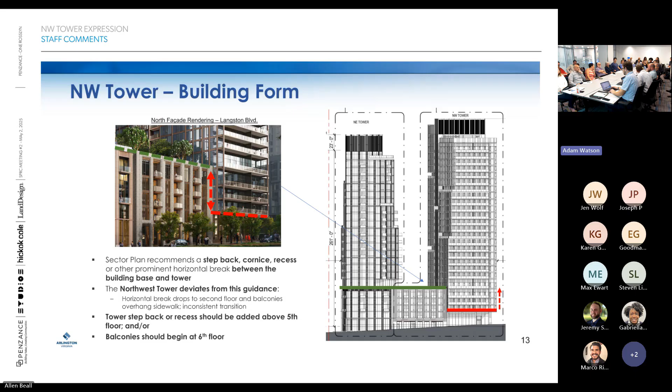Sharing, so... I have a PDF of it I can try. Are you on the Arlington wireless network or are you on a phone? Allen, if it's okay, let me see if I can run it from my computer. I don't know if you've sent the latest, there were a couple of small changes. Let me just email it to you. That's all right, okay sure.

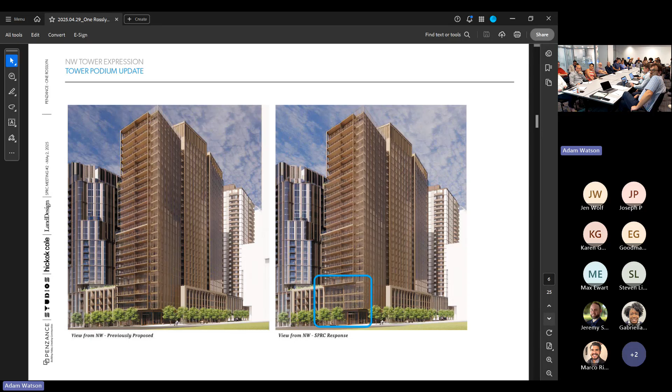On the left is the original Northwest Tower configuration, featuring a consistent application of balconies on the north elevation of the Northwest Tower at the corner of Langston and Fort Myer Drives. On the right is our updated design, reflecting several iterations studied in response to your feedback. We've removed the balconies from the lower levels of the tower to better integrate the podium with the tower above, and to better define the transition between podium and tower elements.

This adjustment brings the architectural language of the Northwest Tower down to the base, enhances light and air access to the retail frontage below, and establishes a stronger, more continuous horizontal datum at the top of the podium. We believe these changes result in a clearer and more cohesive expression of balconies as a design element, and better define both the tower and the podium as part of the overall composition of this tower.

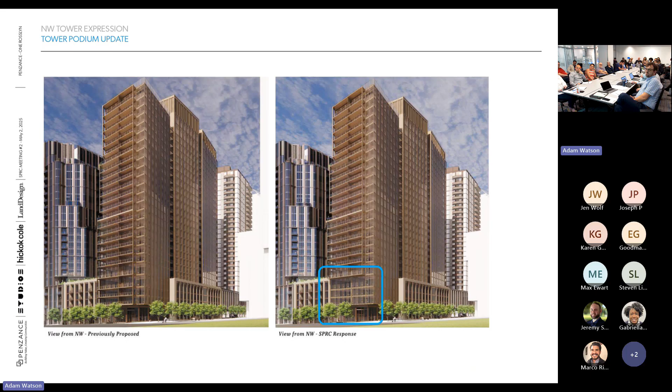Transition from Gateway Park - this is a follow-up item from SPRC 1. We were asked last time to find a way to continue the expression of the park onto our site. We thought this was a good idea as well, so we looked to find what design threads we could draw upon to help knit the two spaces together.

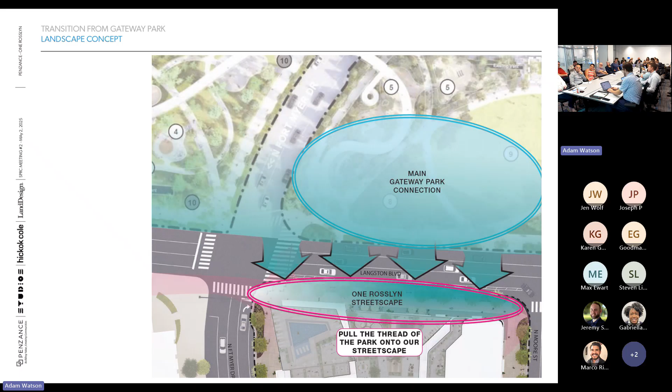This diagram illustrates the revisions we made to the layout. For the planting material, the intent is to mirror and express the same lush plantings on our side of Langston, including matching the tree and understory plantings. This lush landscape material is also intended to extend down both streetscapes of North Fort Myer Drive and North Moore Street towards the heart of Rosslyn.

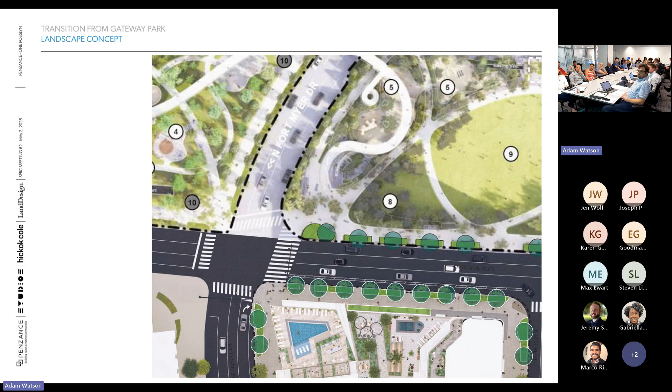Our tree pits here are longer to better match the park, and we will pick up some of the same organic forms being used. These longer tree pits will help provide a lush green experience on both sides of the street, and these longer runs of tree pits will have fewer interruptions, helping with pedestrian safety.

If we were to stand in this location today, we would be standing in a service road. Currently, the service road has no sidewalk along Langston - it has about a 5 to 6 foot walkway against the existing building. As seen in this image, we are transforming this service road area into a new urban streetscape, with generous sidewalks at about 11.5 feet clear width, using county standard paving, street lights, benches, and receptacles.

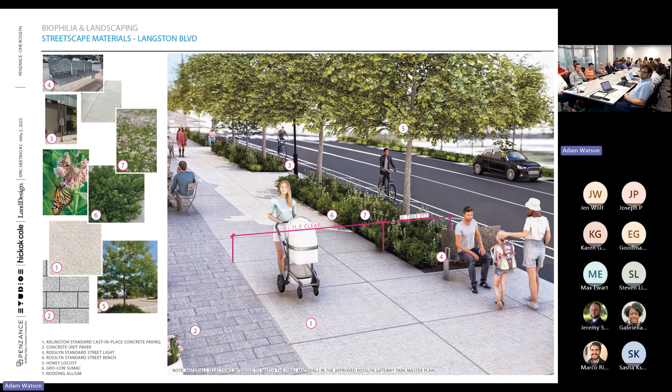As the park gets refined this year, we aim to coordinate with the design team for the park and the county to ensure a consistent biophilic experience.

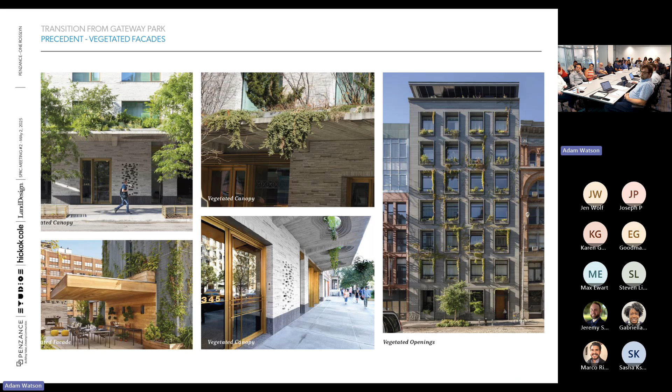We are also looking to continue the biophilia vertically up the building towards the podium. We aim to do this by providing a vegetated canopy. On screen, we have a few examples.

The canopy is proposed to span between the north towers, carrying the landscape material vertically. It is sized to provide adequate soil depth for the planting. The canopy will provide some privacy for the units above and help create additional protection from the elements for the retail shoppers and people dining below.

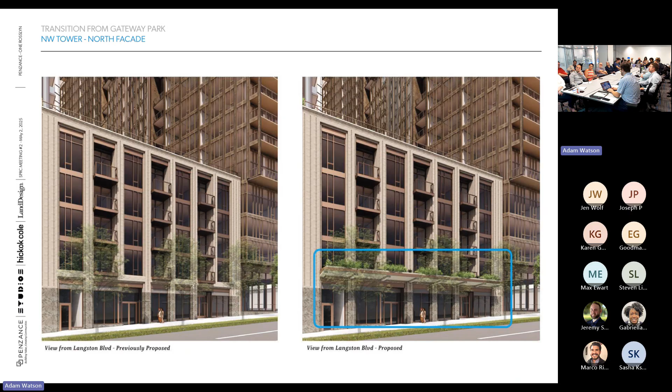Next, we'll cover the 19th Street streetscape, a follow-up item. Our lush planting design continues down the streetscapes of Fort Myer and North Moore Street to terminate here at 19th Street. For this design, we have enlarged our tree pits to provide more greenery, while taking care that they've been coordinated with the vast amount of underground utilities in this area.

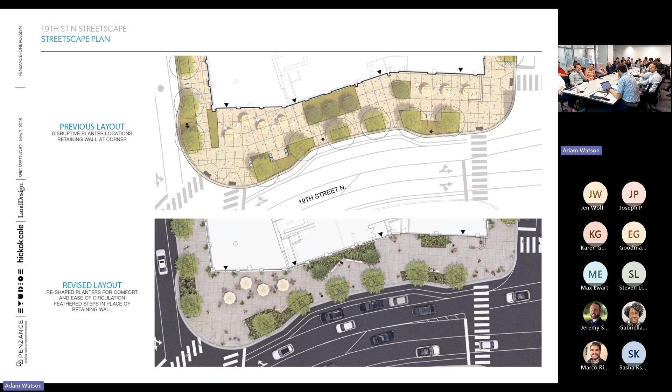This revised layout has relocated the planters to improve pedestrian circulation connectivity. We do have some steep slopes we are contending with here. As shown in this rendering, we have reconfigured the retail entry of the South Tower to have feather steps, allowing for easier circulation and helping to accommodate the change in grade.

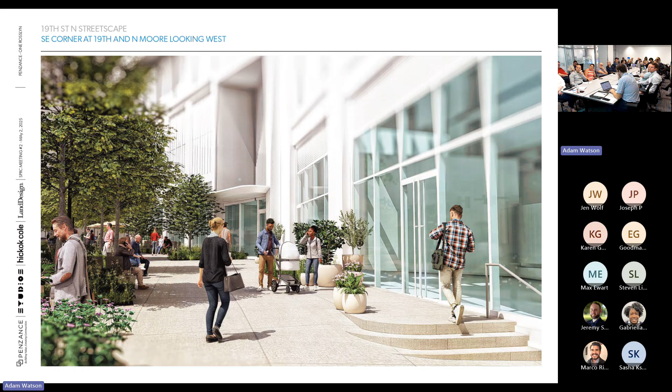This can be experienced in the streetscapes, where we are taking service roads and transforming them into walkable lush places, and at the podium level, where this large area is broken up into smaller spaces, which helps create a sense of enclosure and being surrounded by life.

Along with the biophilic design, we are also providing required elements such as bioretention at the podium level. We are meeting the tree replacement and biodiversity requirements, and we are exceeding our required tree canopy coverage by almost 8%.

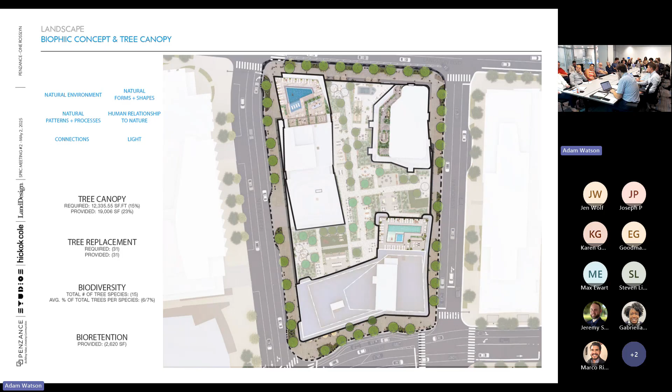Great, my name is Alan Beal, I'm the architect for the site planning. This part of the presentation is new information on transportation, an overview of the transportation aspects.

This is an existing aerial photograph highlighting how the existing buildings are a relic of 1960s and 70s Rosslyn urban planning, with service roads that loop around the site and interrupt pedestrian transitions, buildings deeply set back from the roads, and streetscaping and plantings that only front minimally, such as on Fort Myer Drive.

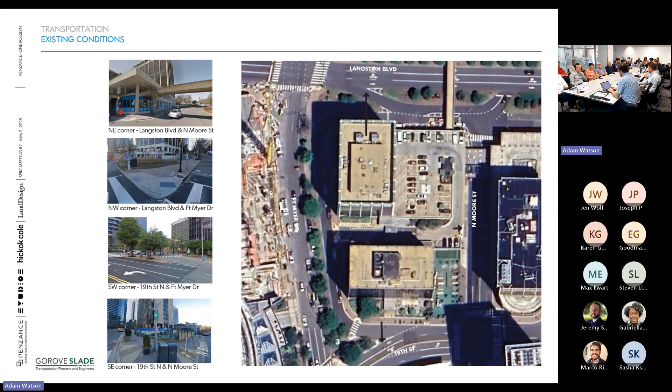Highlighting some of the existing urban conditions: on Langston Boulevard, upper left, there's a lack of continuous streetscape and pedestrian pathways due to the service roads, narrow sidewalks, and lack of queuing area at crosswalks. On 19th Street, there are narrow sidewalks and interruptions to pedestrian paths of travel due to the service roads. On Fort Myer, parking is prioritized over pedestrians on both Fort Myer and the service road, and the walking path on the service road is unusable due to narrow width and lack of continuity. Finally, on North Moore to the right, there are narrow sidewalks that lack streetscape and greenery.

Looking at this proposed development, which we're very excited about, the goal of the sector plan is to create a more urban, pedestrian friendly environment, bring buildings closer to the sidewalk, bring the sidewalk out, and create more pedestrian friendly space.

Looking at this development, the curb lines have been pulled out, making it much more pedestrian friendly. The development looks to deliver much needed housing to the neighborhood. The previous plan only had 150 residential units; this one has 837, including some for-sale units as well. There's 15,000 square feet of retail split between the north and the south. On the north, the retail will help activate the new Gateway Park across the street and enliven the streetscape. On the south, it's closer to the existing node of retail in Rosslyn and Metro. Overall, this will be enough for at least 3 to 5 new retailers, depending on size and final use.

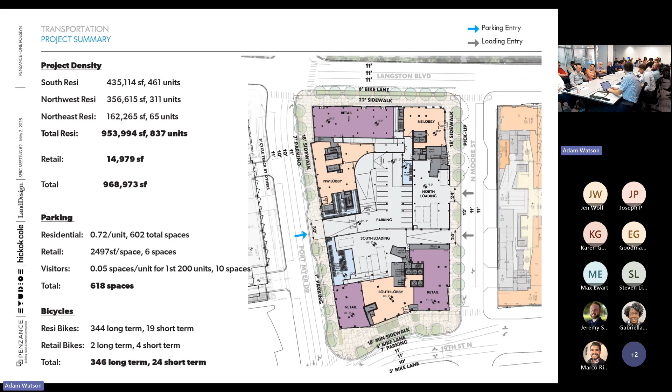Overall, the site design will make it a much more pleasant experience for cyclists and pedestrians by adding bike lanes, more generous sidewalks, and crosswalk improvements. On-street parking will also be provided along Fort Myer, along with pickup drop-off on 19th and North Moore. And finally, protected bike lanes will be added along Langston, further meeting the multimodal goals of the sector plan.

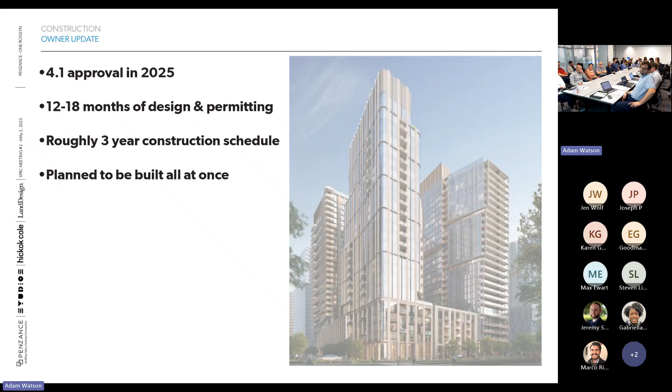So that was it, so last slide. I just wanted to say how excited we are about this project, how excited we are to share the project, and wanted to thank everybody for their engagement in this process Thursday night. So thank you.

While Adam is getting his slides up, I want to make sure everyone is on the same page with respect to the last slide, and only because it took me a good 3 years into my tenure in the Planning Commission to really understand this.

The 4.1 approval means the land use entitlement. It means that from a zoning and land use perspective, the applicant is allowed to move on to the next part of the process, which is getting the plans approved, engineering approved, and getting the permits to actually start building. So we are just talking about the permission to build the thing from a zoning perspective. I like to mention that because, probably due to my own slowness, it took me a while to understand that there was another process beyond what we're involved in.

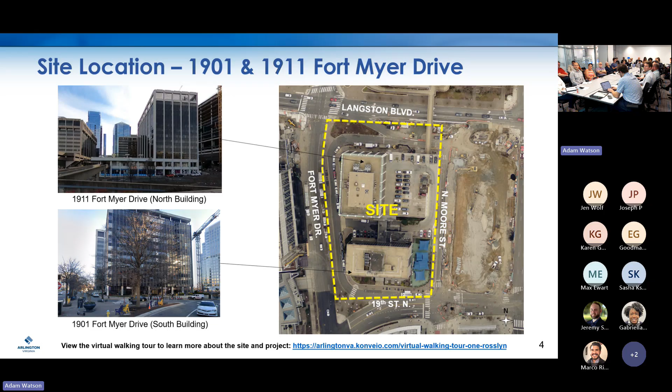Sustainability—I just wanted to touch on the applicant's sustainability proposal briefly. I think Alan just mentioned this. We talked about this a little bit at the last SPRC meeting, but just to reiterate, the applicant is proposing to achieve LEED Gold here. They're not asking for bonus or additional density through our green building incentive policy, but they are committing to doing some things that are part of that policy. That includes things like Energy Star appliances and fixtures, WaterSense plumbing, the energy cost savings Alan mentioned, air and duct leakage standards, and EV charging with 4% installed and 15% EV ready. So this proposal does meet the sector plan's recommendation for achieving LEED Silver or above.

Just briefly to talk about landscaping and streetscapes, and this will bleed a little bit into what Mr. Gibson's going to speak about next. This proposal overall really does further the sector plan principles and policies when it comes to landscaping and our streetscapes. Here on the screen are a couple of principles and policies taken from the sector plan that illustrate how this is being done.

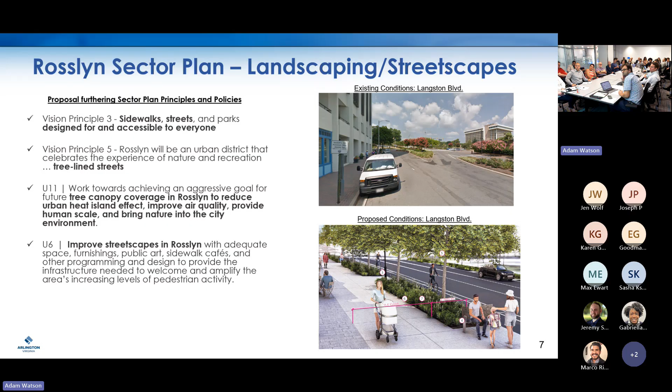As Adam mentioned, staff's role principally in this process is to review projects against the established policies in the county, and then to coordinate our review against all of the other projects that are going on in the area, and make sure that the projects are designed consistent with county standards.

The county has really a number of layers of plans which we use to evaluate these projects. From a transportation perspective, at the high level, we have the Master Transportation Plan. And then as we go down into the sector plan level, in this case the Rosslyn Sector Plan, it has a number of goals and policies which really relate to how transportation will be reshaped at this site and the adjacent sites. It's not just this site—while it's very important to do this, it doesn't work without what has gone on in the blocks east and west of this project.

The recently delivered hotel project to the west and the under-construction RCA project to the east create a transformed segment along eastbound Langston Boulevard, along with improved streetscapes and street network on Fort Myer Drive, Moore, and 19th Streets.

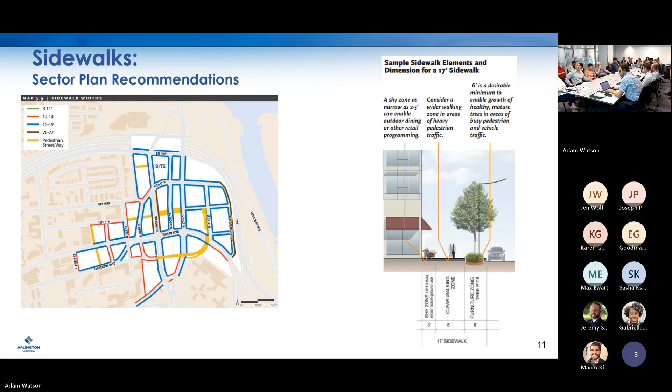This project is coming forward with 18 foot streetscapes for Fort Myer Drive, 19th Street North, and North Moore Street. Along Langston Boulevard, a 22 foot wide streetscape is proposed. So all of the streetscapes are consistent with or exceed the recommendations in the sector plan.

Before we go to the bikes, since this has the cross sections—you'll see that along both Langston Boulevard and 19th Street, new protected bike lanes are integrated into this project. The protected bike lanes were in the plans for both the hotel project and the RCA project under construction. However, because of the way you would implement bike lanes, the hotel, which is delivered first, was not going to implement that segment since it would dump people into a travel lane and otherwise be unsafe. So we are working to implement those bike facilities moving west incrementally.

When the RCA project is completed, it will deliver the first segment. Then with this built out, we'll be able to deliver this and reconfigure the segments of Langston Boulevard adjacent to the hotel to provide three contiguous blocks of westbound and eastbound bike facilities. Of note, along Fort Myer Drive, the hotel is also delivering a sidewalk-grade cycle track type facility, integrated into the sector plan. So there's protected bike facilities on 3 of the 4 sides of this project.

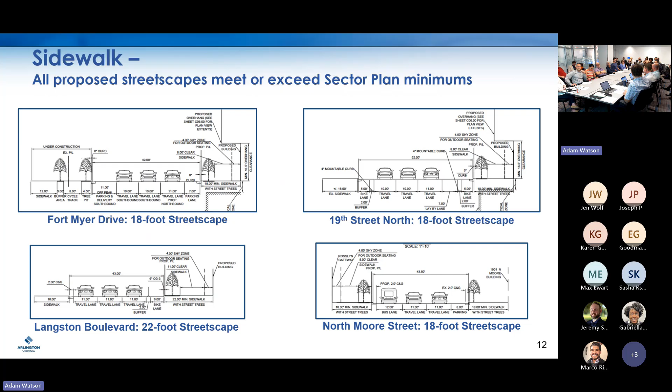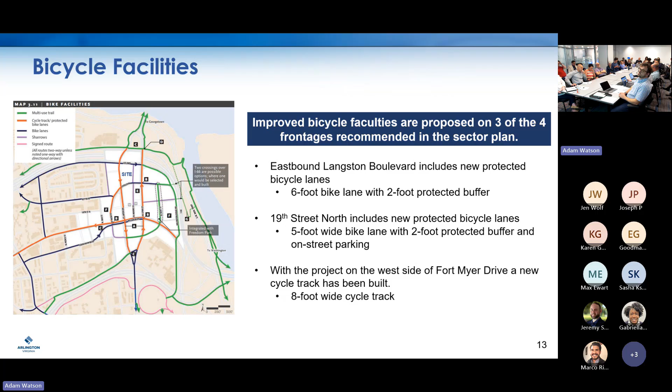I've pretty much covered that a second ago. However, this slide does show the sector plan's overall goals for the bike network, and how we're looking at a bi-directional pair of bicycle facilities on Lynn and Fort Myer, plus additional connections throughout the area with improvements along Langston Boulevard and other portions of the Rosslyn neighborhood.

There's been some question about the through-block connection that was previously approved in the 2012 approval of this project. Having worked on that project when it went through, I don't think my memory is good enough to say I remember exactly what happened, but the sector plan generally gives us a good idea that while there was a through block connection, it wasn't envisioned as a principal pedestrian access point—rather, it was a pedestrian point of opportunity. If cars were going to go through there, we wanted to make sure pedestrians would be able to feel safe going through that also.

Raised above it with a walkway also. I'm not sure about that, but okay, I'm gonna have to—we'll check into that. But yes, it was silly, but yes.

Now you may be thinking about the existing site as it existed around that same time, which did have a number of additional sky bridges that have since been taken down, but it did include the alley. That alley made it into the sector plan and is shown diagrammatically in the street circulation plan, but it wasn't intended as a principal pedestrian area. I think that was one of the questions we had last time, so we just wanted to clarify that.

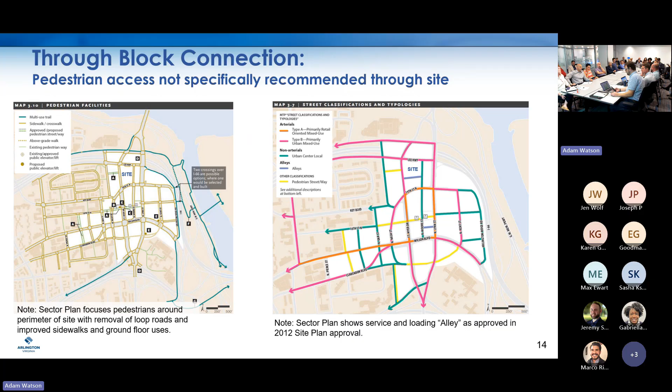The parking and loading aspects, the applicants talked about this a little bit. Generally speaking, there's going to be about 620 parking spaces supporting the 3 towers. I think one of the most important parts of both of these projects is that they've found similar but different ways to accommodate one of the biggest challenges along urban building frontages, which is the penetrations associated with garage entries and loading spaces, particularly loading spaces, because as a building gets taller, it needs more loading.

That only makes those areas dead and wide. So in this case, the applicant has consolidated the loading for this project interior to the project, utilized 2 curb cuts off of North Moore Street, and demonstrated that all of the loading maneuvers can happen within the loading garage, allowing head-in, head-out operations, which is the safest approach for pedestrian access along the frontage.

That's more ideal, but it is not the universal treatment. You see across the street at the RCA project, which is a much narrower site, much different site constraints, that vehicles will have to back in on North Moore Street into their loading facilities. That's a point of what was approved. And then the parking access is exclusively off North Fort Myer, and that also provides head-in, head-out access. For accounting purposes, there are a total of 8 loading spaces in the project, 6 for the residential and 2 for retail specifically.

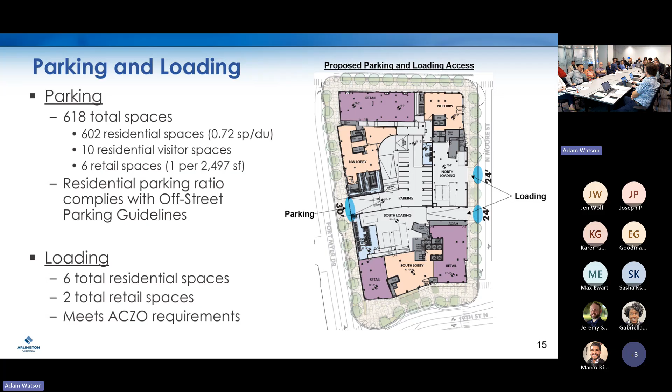We've had some questions about the skywalk system. This is, as stated in the sector plan, the Rosslyn sector plan reinforces recent county policy in recommending the continued demolition of the skywalk system. The ongoing redevelopment of many of Rosslyn's 1960s and 70s vintage buildings offers important opportunity for new buildings to offer improved ground level building use and design, as discussed in the urban design and building form sections of the sector plan. I'm not trying to debate the wisdom of the sector plan, I'm just pointing out that that's the approved policy. Thank you.

We also talked about briefly what staff's role is. We normally don't talk about this in SPRC, we kind of just pass over it, we take it for granted. But in Rosslyn, with so much going on, I think it's important to highlight what staff is doing behind the scenes. I represent a very large team in DES that reviews these plans from a safety perspective, infrastructure perspective, our urban design elements, and streetscape, the different amenities that we're providing, including bike, transit, and other streetscape amenities.

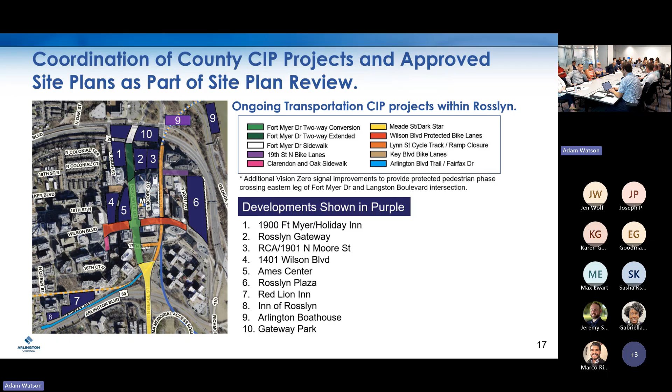Thank you. One other thing, I think I kind of took this for granted and put the slide in last minute, but we forget that this is a principally office site today. It's got terrible configuration of the streets, but in addition to that, the office project generates traffic. Just like everybody else, that's not a bad thing. We live our lives, we move around, traffic and movement is important.

And we haven't run the numbers, maybe Felice has, but it would be a substantial reduction from what has already been approved and could be built today on the site with the mix of office and residential approved in 2012.

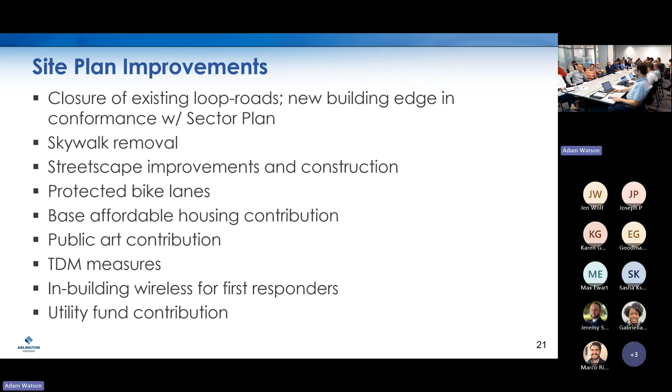Mr. Chair, with that, I think we are ready to pivot to our discussion again. Tonight, we're talking about transportation first. Actually, you can take these in any order you prefer, but transportation, landscaping, biophilia, sustainability, community benefits, and no, all right.

Many of you likely are familiar with how I like to do this. I like to go around the table first with informational or clarifying questions, and then with comments or statements or concerns, etc. As an example, I will be asking the applicant, as an example of an informational or clarifying question, whether the 50% EV ready goal means 50% inclusive of the original 40, or 50% on top of the original 40, meaning 90%.

Don't answer now. But 15%. You said 15. So 15, not 50. I thought I heard you say 40 at start, and then no, 4. This is why we ask the clarifying questions. And the whole remains. The question then means, it'll be the same question, right? Like, we're not talking 90, we're talking 4 and then 15. 4 and 15. 15 inclusive. So that's an example of a clarifying question.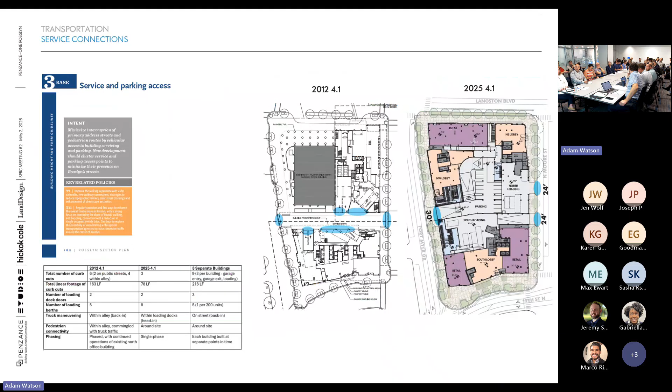Sure, I think what you're describing is the 2 on the west side. Yes, there's 2 on the west side, side by side. And this would be adding 1 on the more easterly side. Yes, the one on the east side - you can see it here. It's the one for the site on the east side, right there, and it's in between the 2 on the west side. So you can see these curb cuts.

Okay, thank you for clarifying that it was taken into consideration, but I'll have a point of concern later. Thank you. Adam Green, Public Art.

This may have already been discussed outside of this, but is the public art contribution a cash contribution intent, or is it integrated into the project?

Mr. Green, I can respond to that. At this point, we're going to be doing the standard site plan condition, which provides the option to either do a cash contribution or commission a piece, which is determined as you go through the process. So we haven't settled on one option or the other at this point.

Thank you. Any comments or questions? Clarifying questions only. And only about transportation? About any of the 4 topics. Oh okay, thank you for that question, because we're not going to go around for each of the 4 topics separately. We'll just proceed.

So on Langston Boulevard, is there a protected bike lane? There were a couple of pictures shown and it wasn't protected, but I thought I heard someone say it was intended to be protected eventually. The pictures didn't show a protected lane, just stripes. I think the renderings don't show the curb stops and bollards very consistently. So it will be protected, but there's the space for it. Okay, that's good.

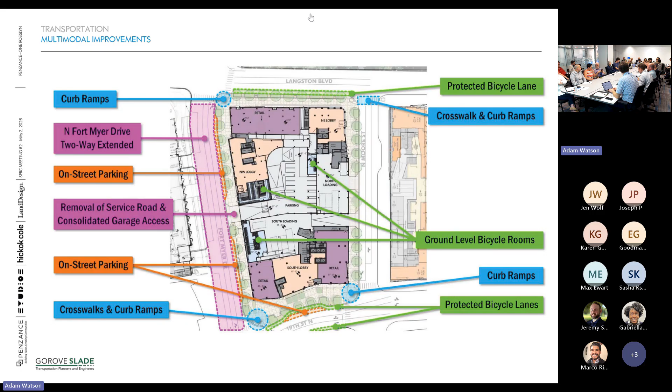I understand you're not applying for the Green Building Incentive Policy or Program, but I wonder if you had considered installing renewable energy, and whether your design is accounting for the future—whether your installation design will permit that deployment if you're not considering it right now. The reason is because we are heading toward electrification, renewable energy, and decarbonization.

The other question I had is whether you are hoping or budgeting for purchasing renewable energy if you're not installing solar PV in your building right now. Your design is not. Other questions refer to decarbonization—for example, beyond the electrification of domestic hot water, what other systems are being electrified to reduce the building's carbon footprint?

I noticed in your sustainability scorecard document that you are proposing to use gas boilers for supplemental heating. I wonder, in your design and modeling, if you considered any other options to reduce fossil fuel use.

Is your design accounting for embodied carbon, meaning the carbon that is in your materials? There is no information whatsoever in your materials on that.

And if your project plan addresses operational carbon emissions over the building's lifetime, and that refers to future changes that you would have to do.

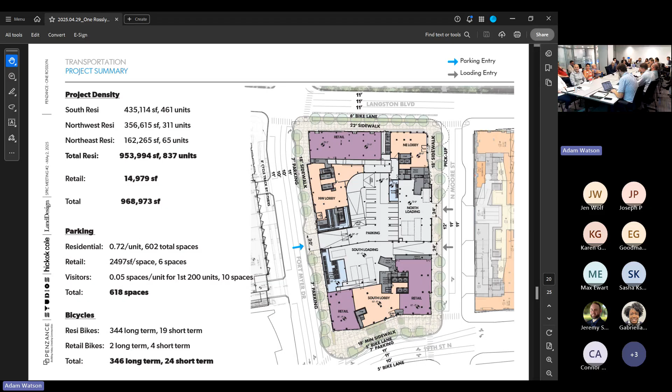No, off the top of your head, if not that's fine—you can do it in 10 seconds. Is it crossing Fort Myer? Yeah, that's 19th, right. I know the light gives you 32 seconds. I'll go with that. I can get around to 11. I believe it's like 5 lanes. It's probably 55. We can get that—that's fine. Okay, I should have clarified. Both of those are right.

All right. Who's counting? Anything less than 12, you gotta run. Exactly, 10.

Back to Mr. Hussein—yeah, sorry, just really last question. Parking ratio, I think you said was 0.72, I believe, which is fine. It's on the lower end, but was there a way to make it even lower, considering that Rosslyn's a pretty densely populated area? Is there any room to make it lower?

Yeah, I think a large part of it is the demand for the unit types. One of the things we're really proud of here is providing different unit types we don't typically see, particularly larger units and for-sale units, and that drives a higher parking ratio—bigger than you might see in some of the older rental product that's come out. Okay, awesome, that's all I have.

Thank you, Commissioner Tillman. Yeah, transportation—will the condo parking spaces be sold separately from the units, or do they come together? Likely separate. Okay good. The loop roads, who owns it? Is it county right of way?

Is it county has an easement through it, or is it privately owned currently? It's mixed. A portion is owned in fee by the county, where they own the underlying interest. A portion is owned in fee by the developer, but with a county easement over top of it, both of which require vacations in order to build or to harvest the density.

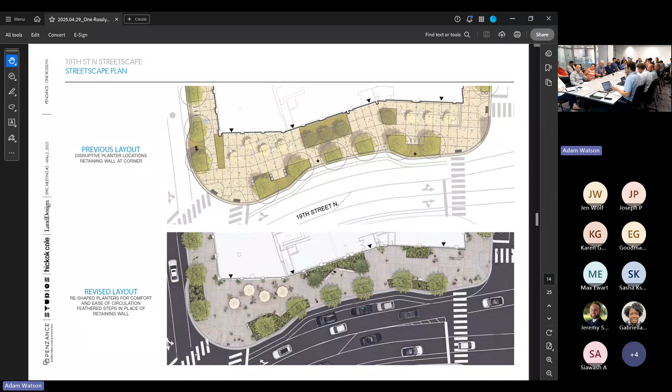The intersection of Fort Myer and 29, Langston Boulevard, I think that's probably our busiest intersection at this site. I have only seen traditional crosswalks. Has there been any thought given to a more aggressive pedestrian friendly model, like a Barnes dance or a raised table or something that would follow through on the need for the pedestrian experience? The operations of the signal is a county issue. It's not an issue with the building. The county will make all determinations of that, regardless of this building being there or not. It is our intention to advance, foster, and fund public safety at grade at that intersection.